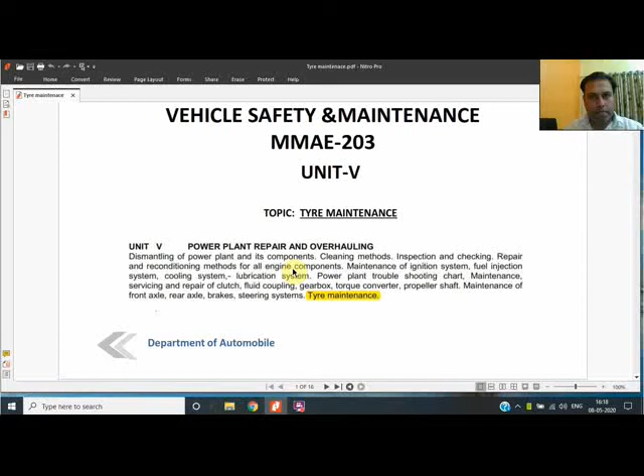Welcome, dear students. In today's lecture, we are going to cover a topic that is tire maintenance - why tire maintenance is required, and what we used to do for inspection and maintenance of tire. We will go through the steps of inspection, why there is a need of tire maintenance, as well as what basic procedure is used for maintenance of tire, that is retreading or tire rotation, and other things we are using. So starting with what tire is.

Tire is an O-ring shape made from rubber, natural or synthetic fabric, and wire, etc. Either there might be wire, or if it is a bias type tire, then threads will be there. But if a radial type is there, then wire should be there. Wire is also required in the bead, because in the O-ring, this inner ring portion is called the bead, so wire is required there.

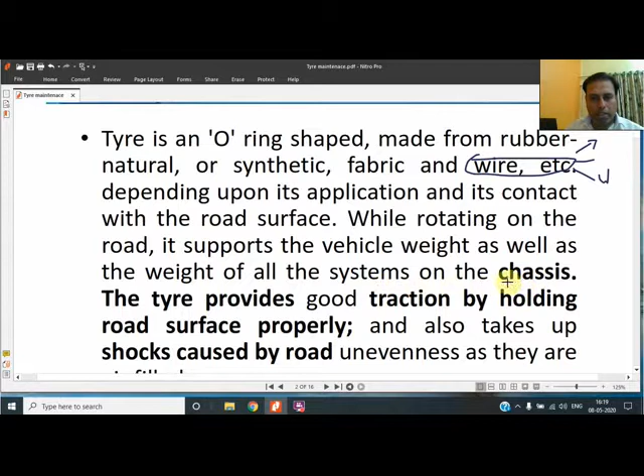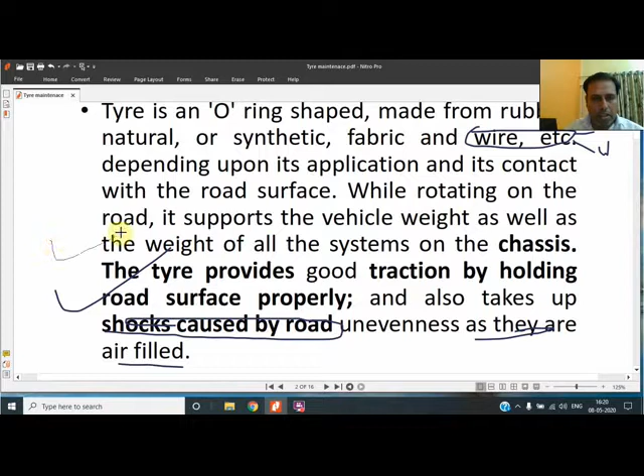Depending upon its application and its contact with the surface while rotating on the road, it supports the vehicle weight as well as the weight of all parts of the chassis, so it is a main supporting medium. The tire provides good traction by holding the road surface properly, and also takes up shocks because it acts as a shock absorber, as they are filled with air. So it is a very important part of the vehicle, for comfort as well as for the main profile of the vehicle.

Now the shape I have shown you, the O-ring shape, is the basic terminology being used. There are nomenclature methods also of the tire, but due to the constraint that we are going for inspection and maintenance only, this topic will be covered only, because we should be well aware of what maintenance and inspection methods are there, popular in the market.

So what the maintenance is - it is quite prudent to inspect and maintain tire at regular intervals for proper performance and safe running. The interval of inspection and maintenance totally depends on type of vehicle, condition of road, and driving methods. Although these three things are mentioned, as per the type of vehicle, the manufacturer gives the tire and also provides guidelines on when to go for inspection and when to go for particular maintenance. The frequency of inspection increases as it runs more.

After a certain period, based on its condition, it should be replaced or repaired. So we will go for the repair - how to repair it, and what things are used for repairing a tire. That is the retreading.

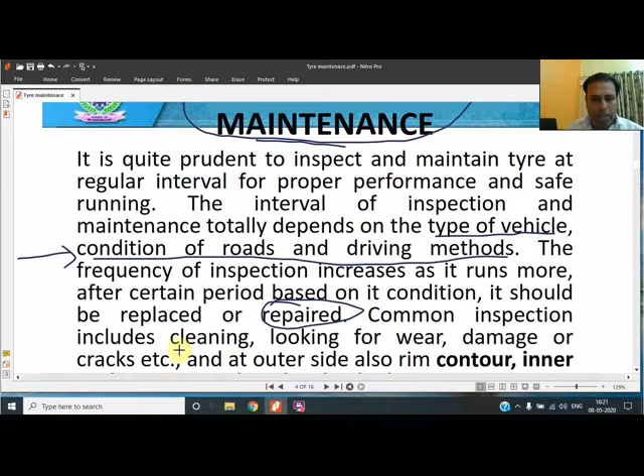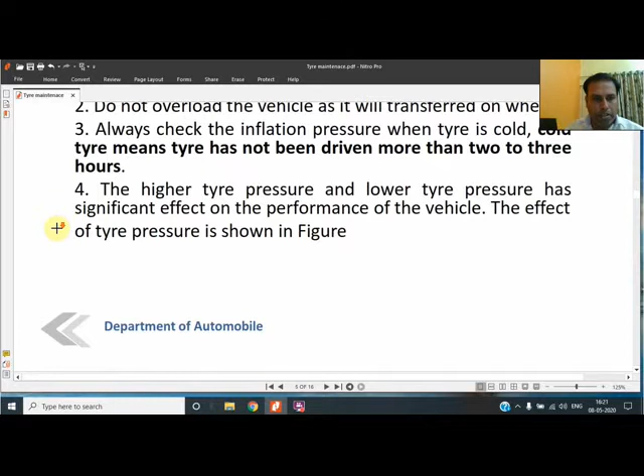Common inspection includes cleaning, looking for wear, damage or crack at the outer side, also rim contour, inner surface, etc. need to be checked. So following things need to be taken care of for proper maintenance and inspection of wheel and tire - these are the steps, meaning four things should be taken into care.

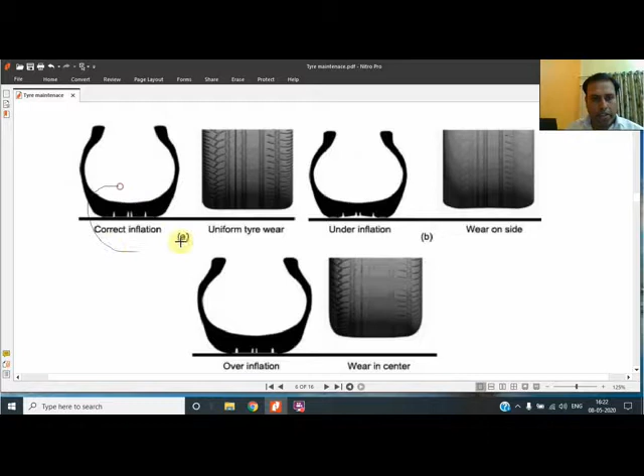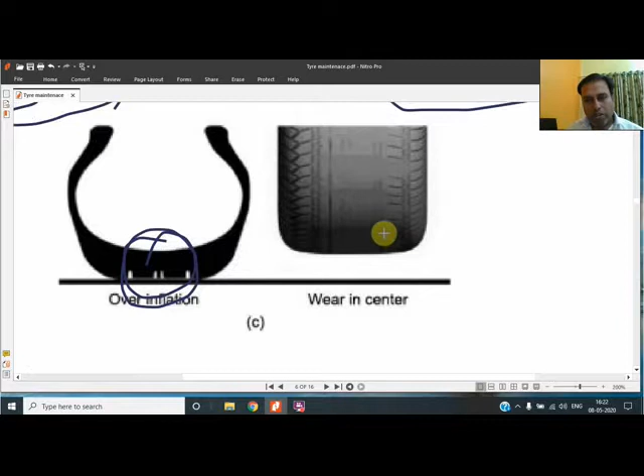Always maintain tire inflation pressure as recommended by the manufacturer, because if the tire has correct inflation, the wear will be uniform. If underinflated, wear will be on the sides - you can see the sides, the treads are removed at the side due to wear at the side surface. And if over-inflation is there, then contact will be at the center only, so the wear will be at the center. So the main thing is that correct inflation should always be there.

The second thing is, do not overload the vehicle, as it will transfer onto the wheel. And always check the inflation pressure when the tire is cold. Because when the vehicle has already run for several hours, the tire gets hot due to friction as well as braking forces. At that time, if you measure the pressure, it will automatically be high. So inflation pressure should be measured only when the tire is cold, when its temperature is cold. So standard pressure will be measured, and that will be maintained by filling air.

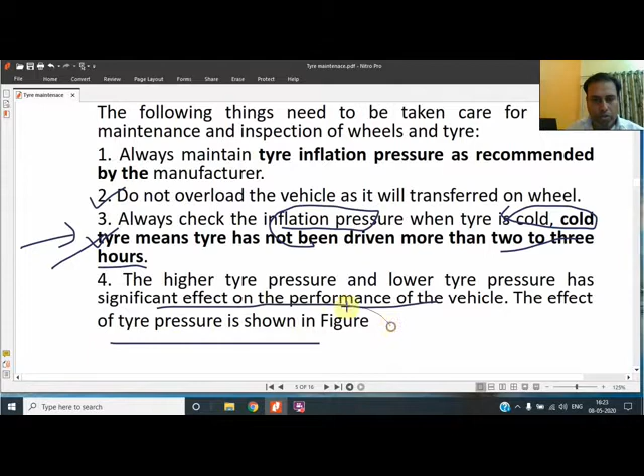The higher tire pressure and lower tire pressure have significant effects, and the effect has been shown to you in the figure also. This was the figure which was shown to you earlier also.

Now, tire wear indicator - what it is, because we have to go for the inspection, and the main inspection means when we are going for the inspection of a tire. General inspection we also used to do in our lab also. So this inspection is TWI, that is tire wear indicator. So what is tire wear indicator?

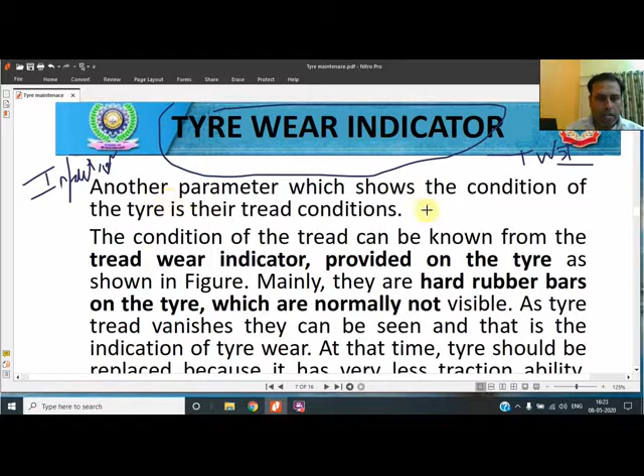This shows the condition of tire in the tread condition.

Before reading the literature, I would like to show you one video of how the tire wear indicator works. This is an illustrative video I downloaded from the net, and in this video you can directly see a tire, and on the side wall there is an indicator, either in the form of an arrow or directly written on the tire that it is a tire wear indicator.

In the same direction, if you proceed, whenever there is depth in the tread, you will see a horizontal bar of rubber. If there are 3 cuts in the tread, 1, 2, and 3, then you will see a horizontal rubber bar elevated there, and that is called the tire wear indicator, because as soon as the tread gets damaged, the tire wear indicator will automatically come out.

He will be showing it, it's a very simple thing. In this same direction, as they have mentioned, the side wall arrow was mentioned.

In the same direction, if you proceed, you will see one tire wear indicator over here, and another over here. So the tire wear indicator is shown, and for a worn out tire, the tire wear indicators have come out level with the tread. If you touch it with a finger, you will directly feel it, because they are no longer hidden - these vertical lines are out.

These are measured by means of a depth gauge or vernier calipers, because in our lab you use a vernier caliper as a depth gauge to measure the height. If the depth is less than 1.6 mm, then the tire is to be replaced as per standard. Very few go by this, because I mentioned the figure - 1.6 mm should be the value.

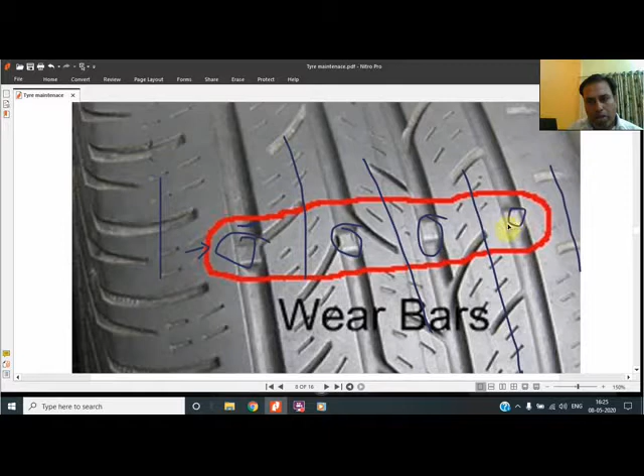One more image I downloaded from the net - you can see these are the vertical bars. Over that you have to measure the depth, and they should be well hidden inside these grooves. If the tread wears out more and more, all the treads wear out, then they will come out, and their depth from this level will be less.

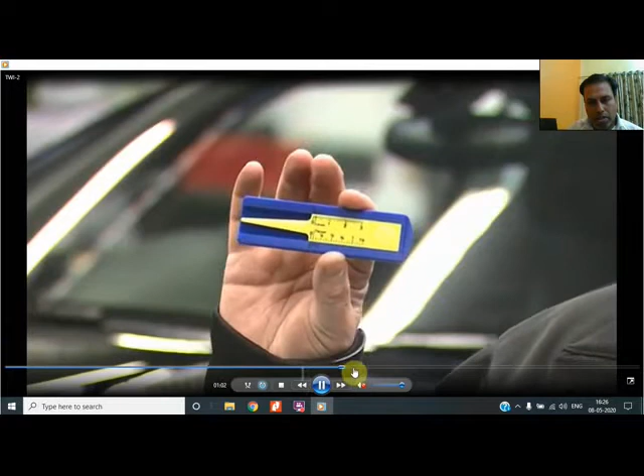How to measure the depth? I would like to show you one more video - the Michelin video I downloaded. In this, he uses a particular instrument, a depth gauge, which he places directly on the tire surface, and whatever portion is inserted inside will show the reading.

He is measuring the depth at somewhere else - he should have measured on these lines on the tire wear indicator, but he is measuring somewhere else. So when he is measuring, this much portion you are seeing is the height of the treads.

So if the value is less than the particular value I have shown, that is 1.6 mm, then the tire is to be replaced.

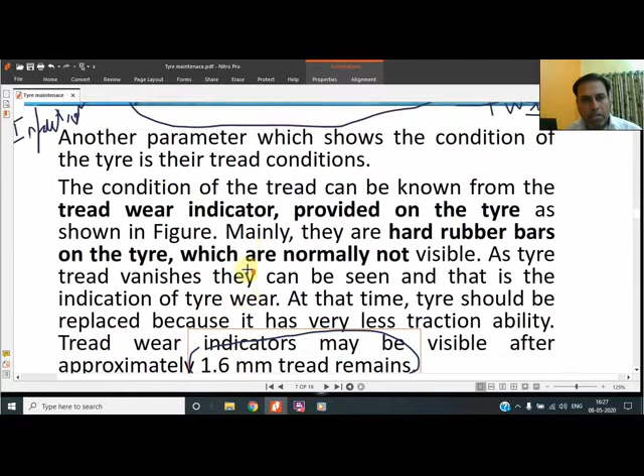Going through the literature once again regarding what tire wear indicators are, I have shown you the figure also - in the figure you can see the tire wear indicators shown, this is 1, 2, 3. These are visible or can be directly hand touched if the tire is worn out.

Once again, the video shows when they can be touched, when the tire is worn out.

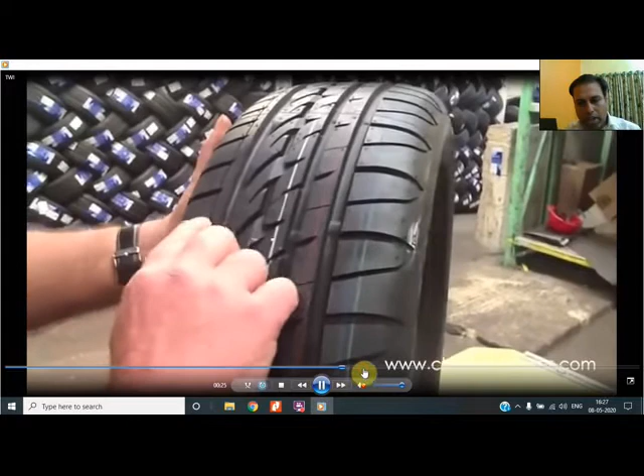For a worn out tire, the wear indicators are level to the treads, meaning they have come out. They are no longer inserted inside. Earlier they were much below the surface, but now as the tire has worn out, they have come up to the level.

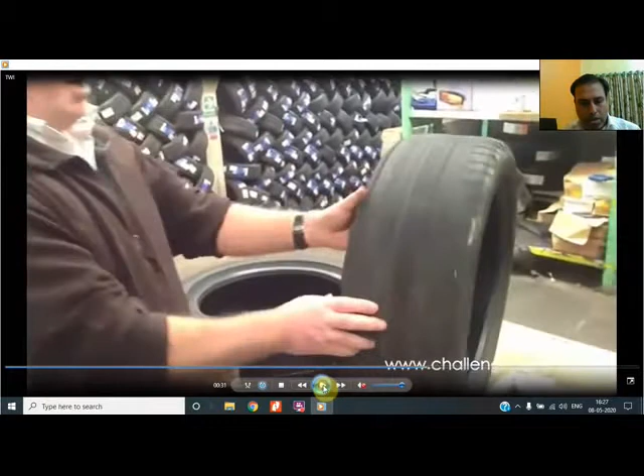This is the main thing you have to check. The condition of the tread can be known from the tire wear indicator, because anyone can know just by putting his finger on the tire as shown in the figure. Mainly they are hard rubber bars, shaped like a bar, and they are well inserted when the tire is new.

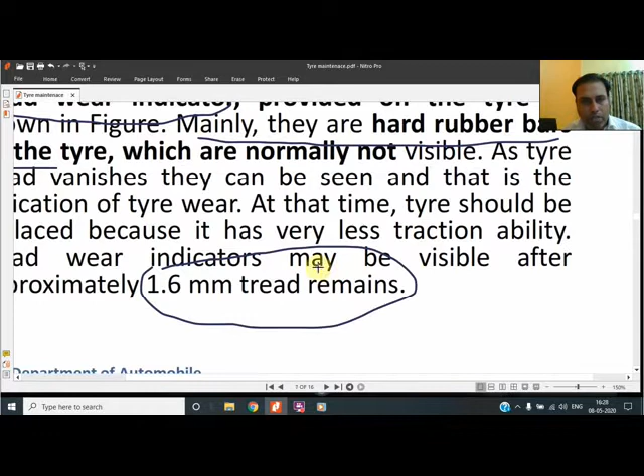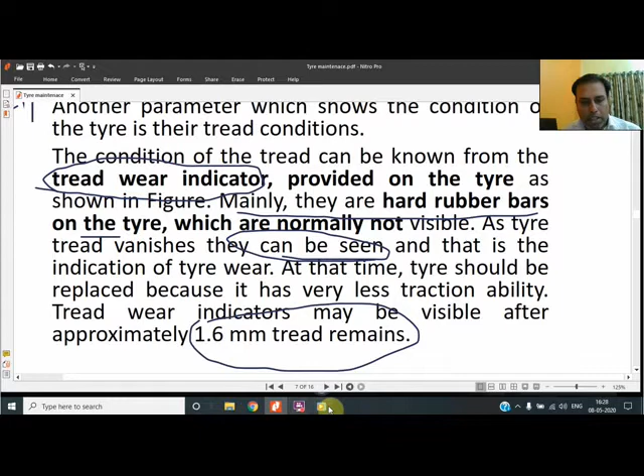On a tire, they are normally not visible, but as the tire tread vanishes, they can be seen. So that's what I was saying, that they become visible as the tire gets damaged. We are able to directly touch it because the depth is no longer there, the depth has gone out, so we can directly touch it.

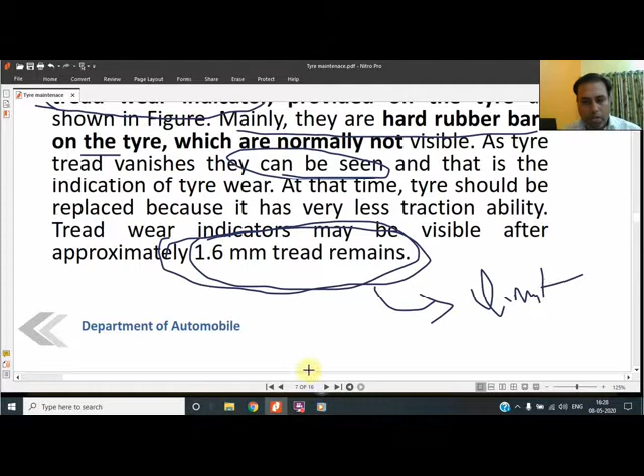The tread wear indicator may become visible after approximately 1.6 mm of tread remains. This is also the limit, because if the tread is reduced to only 1.6 mm, then we have to replace the tire. This was shown in the video.

If the tread depth is less than 1.6 mm, you have to measure the depth of the tread. You will measure it, and if it is less than 1.6 mm, then the tire needs to be replaced. This is how the tread depth is measured, and the value of 1.6 mm is mentioned as a standard value in this video as well.

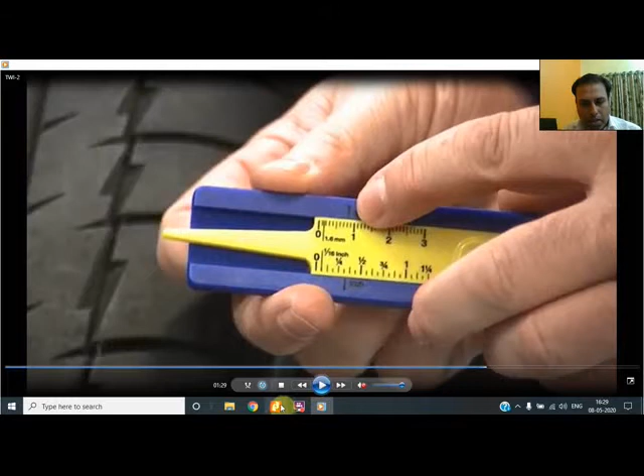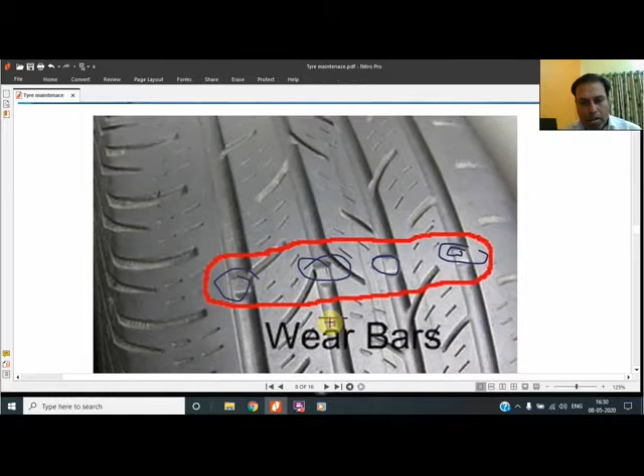If the tread goes on and reaches a depth of 1.6 mm, then the tire needs to be replaced. That's why 1.6 is mentioned separately as the standard value. You should learn it, it is given in all the literature. The value should be 1.6 mm for replacement of the tire, meaning this depth from the upper level should be 1.6 for a worn out tire to need replacement.

Tire rotation is also a method, because we have gone through the inspection method already. That was the inspection method I was telling you about. Now, what remedies can we do?

The remedy to increase the life of the tire is to rotate it, to improve the life of tire treads and reduce uneven tire wear. Since most vehicles we use are front driven vehicles, tire rotation is necessary, and the weight is also more on these front driven vehicles.

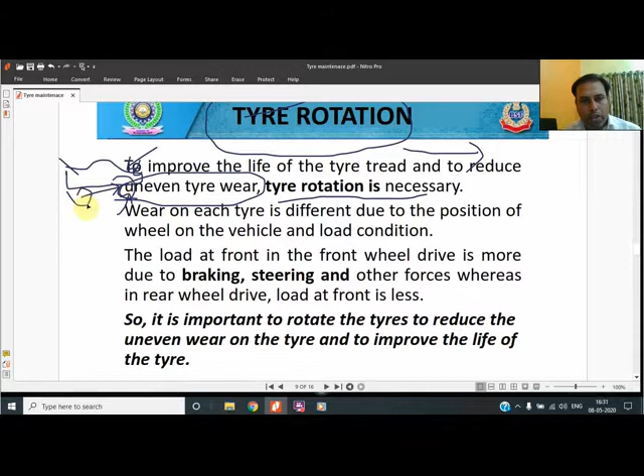In the front side, the engine weight is also there, as well as the drive train used to give power, so more wear will be there. So the tires should be given the chance to rotate, and the rear wheels which are not being damaged as much should be rotated to the front.

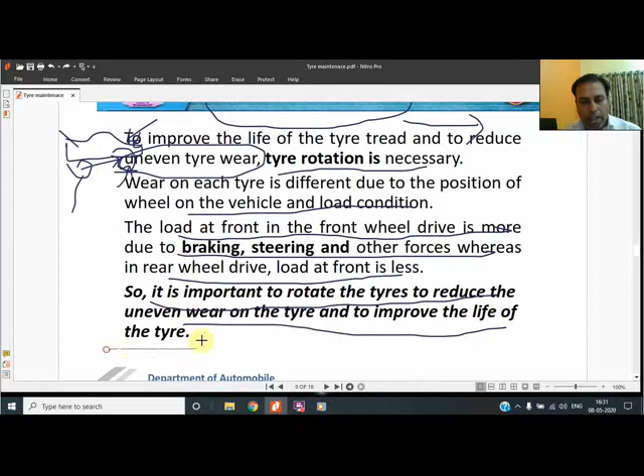Wear on each tire is different due to the position of the wheel on the vehicle and load condition. The load at the front in front wheel drive is more due to braking, steering, and other forces, so more wear will be there in the front. It is important to rotate the tire to reduce uneven wear and improve the life of the tire. This is one of the remedial methods we use.

This remedial method is shown to you, because not all vehicles are front wheel drive. The cars we commonly use are front wheel drive, but not all vehicles are. There are three methods for rotation: when the vehicle is front wheel drive, how the four wheel rotation is done; when the vehicle is rear wheel drive, such as in a commercial vehicle with a propeller shaft, how it is done differently.

The engine is at the front, but the propeller shaft gives power to the rear wheel. So what method will be used for that? And if you're including the spare wheel also, what method will be used for front wheel drive and rear wheel drive? Altogether there are 4 to 5 methods.

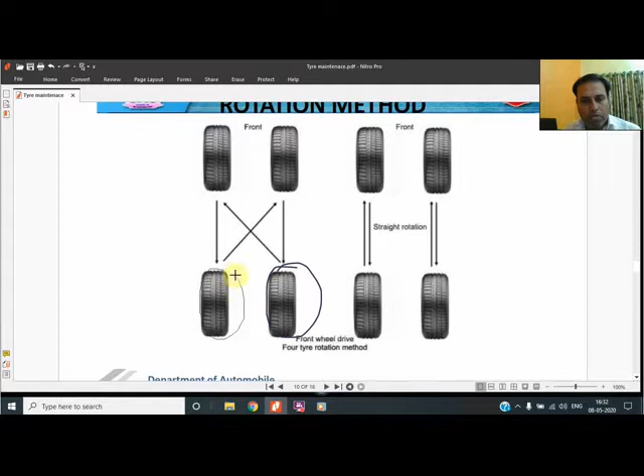Starting with the first, the front wheel drive vehicle. In front wheel drive vehicle, the arrow directly indicates that the front wheel will directly replace the back, and this front wheel also goes to the back side. These will go in the cross direction, which is adopted for the rear wheels to get uniform wear of the wheels.

Although the sign of indication is not seen on the wheel, manufacturers generally give a kilometer range, typically 8,000 kilometers, for rotation of the wheels. If no sign is seen, rotation should still be done to prevent uneven damage of the wheel.

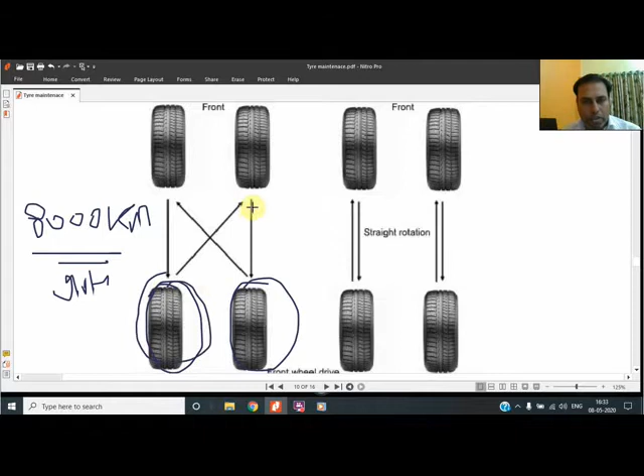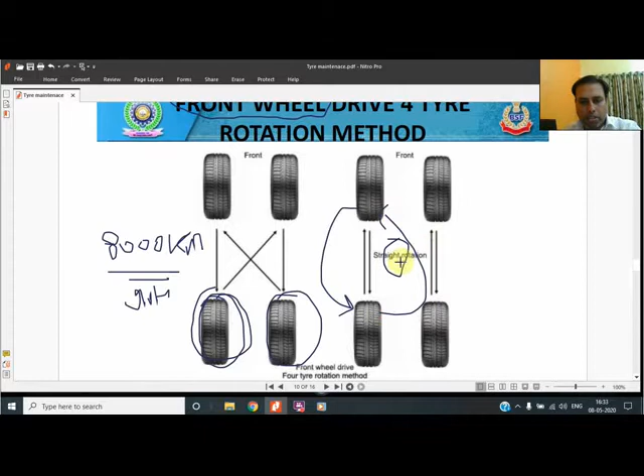Another method is simple straight rotation, directly moving to the back side and to the front side. This method is also there if the vehicle is front wheel drive. So the front wheel gets the chance to go to the rear, and the rear wheel which is safe gets the chance to go to the front.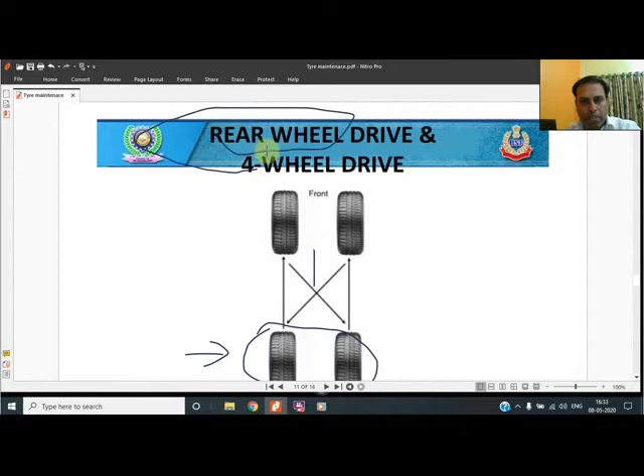If the vehicle is rear wheel drive type or four wheel drive type, the rotation is shown here. In rear wheel drive, the rear wheel will go to the front, because whichever wheel has more load will directly go to that place. Either they can go crossway, for wheels which have not had much load, or they can go directly, because direct straight rotation is also given.

The last method is if you include the spare wheel also. The rear side wheel gets replaced by the spare wheel, so that rear side wheel gets the chance to become the spare wheel. Other rotations and directions are given showing how the rotation is done.

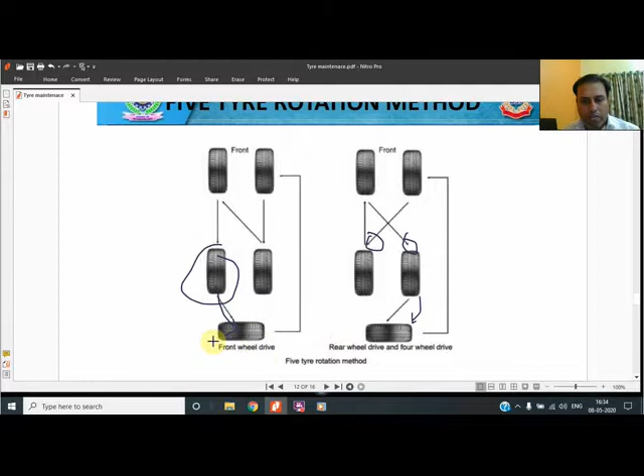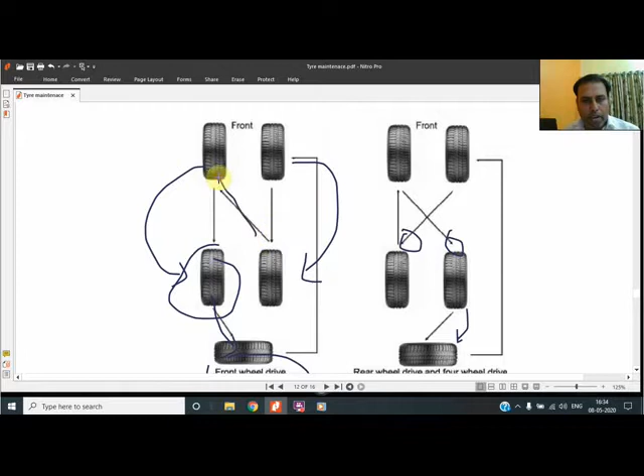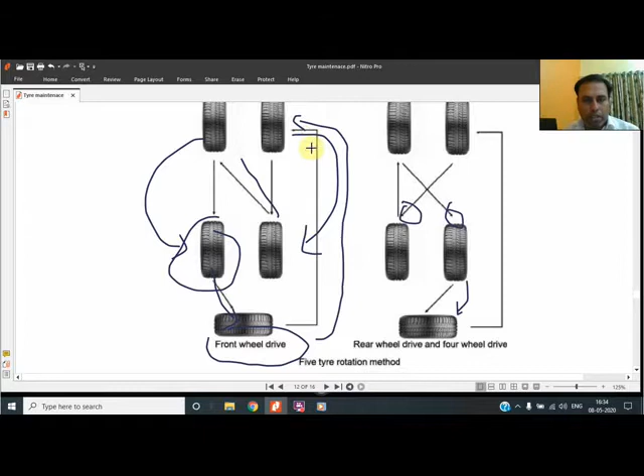So in this case there are two cases. One is for front wheel drive - directly the front wheel will move to the back side. But this time, one rear wheel will go to the front, and the spare wheel, which is completely new, will directly go to the front driver side, meaning it goes to the most adverse condition position. And the wheel which is not much used will go to this position. The arrow shows how the replacement will be done.

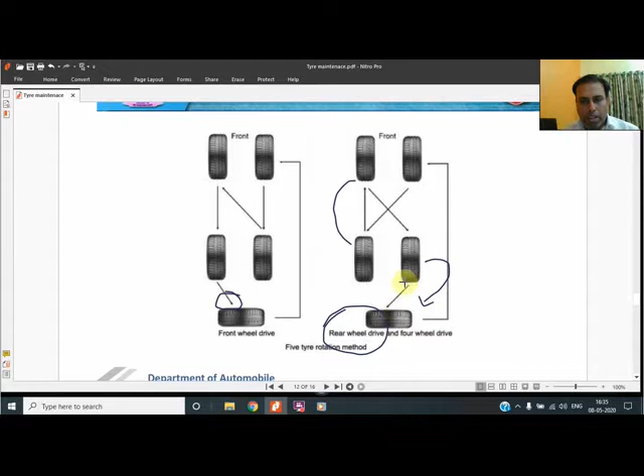If the vehicle is rear wheel drive, the rear wheel will directly go to the front, as shown here. One rear wheel which is being utilized more will go to the spare wheel position. This is how the complete rotation will take place.

Now retreading is another method for maintenance, because we have gone through inspection first. For inspection we use TWI. For prevention we use rotation. Now we are going for direct maintenance. If the tire is completely worn out and requires replacement, but the condition of the casing of the tire is good, then we go for retreading.

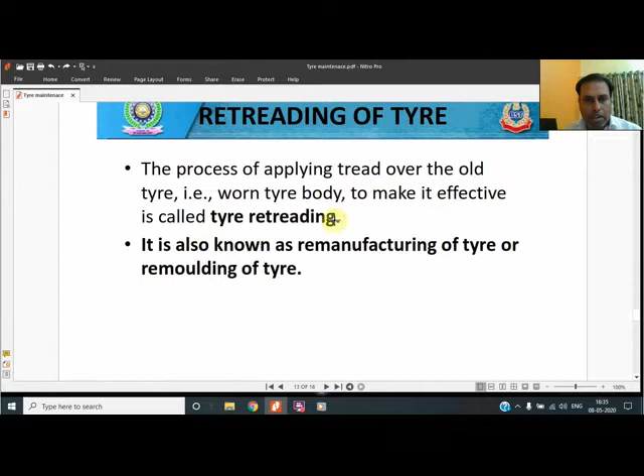The treads are removed by buffing from the tire surface, and new treads are applied. Retreading is the process of applying tread over the old tire, the worn tire body, to make it effective again. It is also known as remanufacturing of tire or remolding of tire.

There are two methods for retreading. One is the hot cure method, in which the treads are removed from the tire and a rubber coating is given on the particular tire by calendering mechanism or other mechanism directly from the roller. The treads are developed on the tire itself by the hot cure process, meaning a high temperature is given to it.

In the casing itself, the treads are developed. Whereas in cold cure, what used to happen is the treads are pasted onto the tire, and these pasted treads are vulcanized so the bond is made fixed.

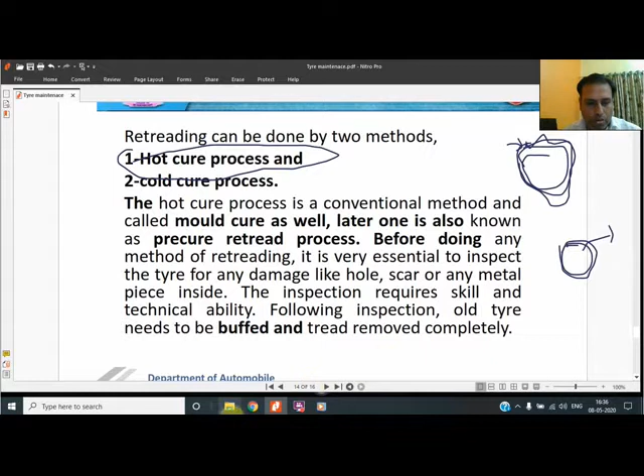I will show you some videos of how both methods, hot cure and cold cure, are done, because retreading is done by two methods. I am going to explain both to you. The main thing is buffing and skiving, the main steps used.

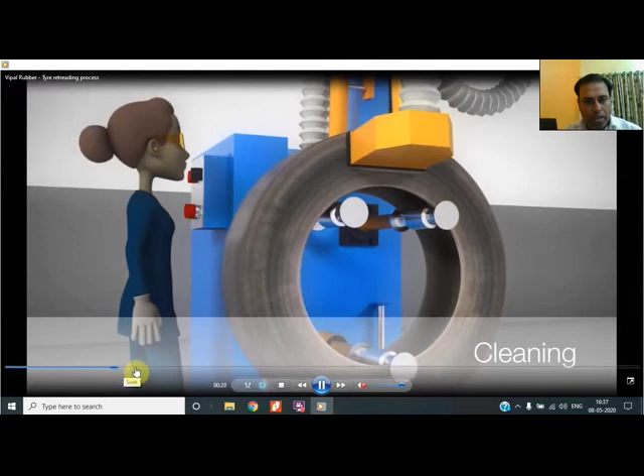Starting with the process, we should know what we are doing. So the old tire comes to a factory, and this is being shown. Visual inspection is done to the tire, cleaning is done, and it is kept in a hot chamber so that any moisture gets removed.

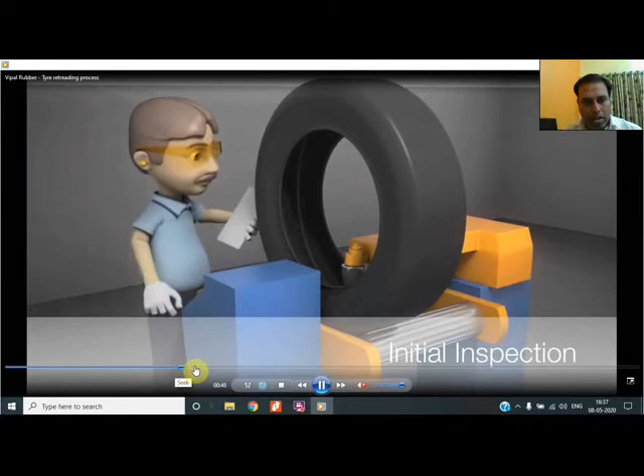Now the buffing process will start, because after inspection they go for buffing. You can see from the video that they are removing the treads using grinders, and the treads are removed from the tire. Now the skiving process will take place.

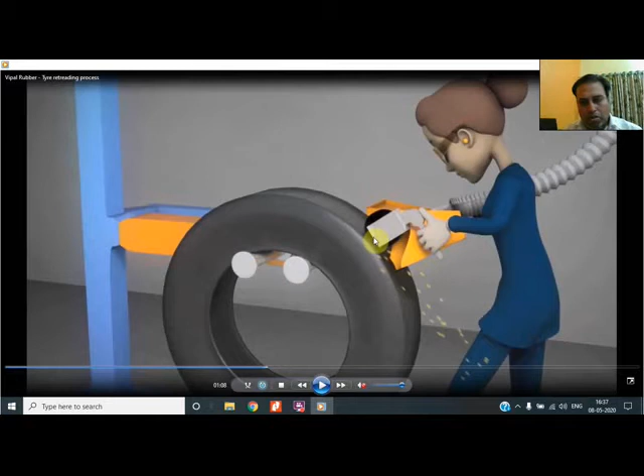In skiving, if any damage is there, it is rebuilt, whether the damage is in the bead, the outer surface, or the side walls. Some solutions, rubber patches, or other things are used to remove all the damages on the round surface.

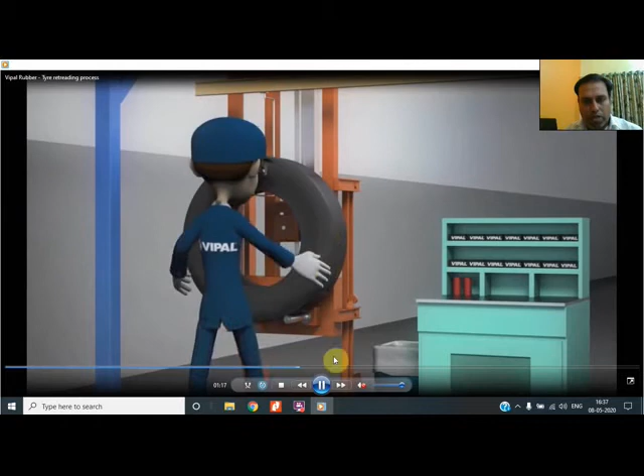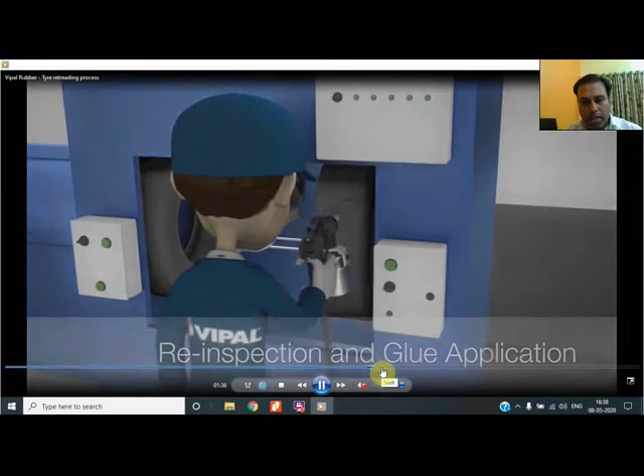Repair application and patching, everything is done after skiving, and thereafter the tread is applied. The glue is applied. There is reinspection, and after glue application, they have pasted the tread.

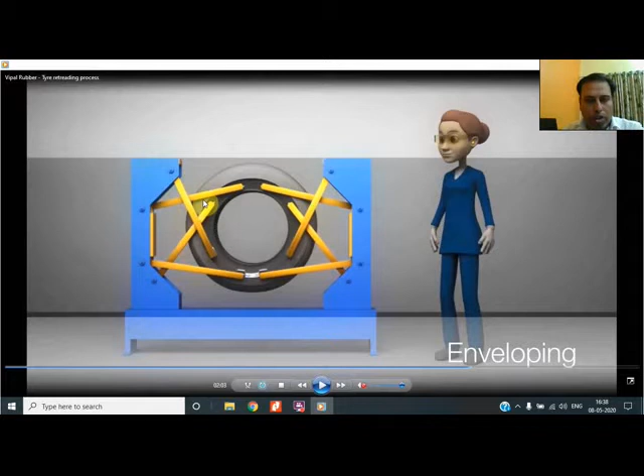This pasting of tread is called cold curing, because a tread is directly pasted. The cold method is called so because they directly paste a tread and are not sending it for curing. Curing means heating the tire in hot steam or an oven type setup.

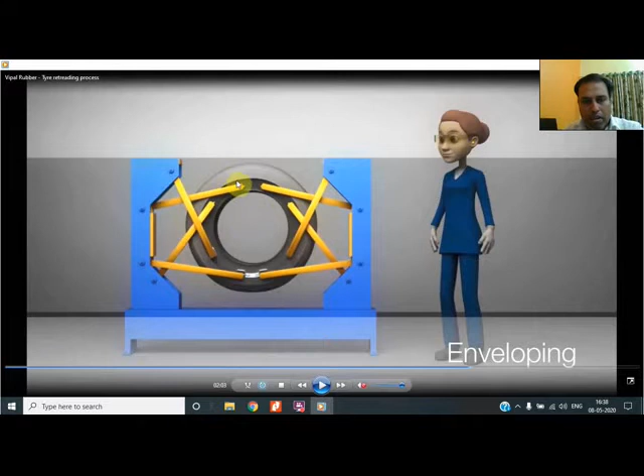The figure can also be shown: a machine, the vulcanization chamber, is there. In that, the tire is sent at a certain pressure for maintaining the pressure. An envelope has covered the tire. You can see an envelope is there on the tire, covering it.

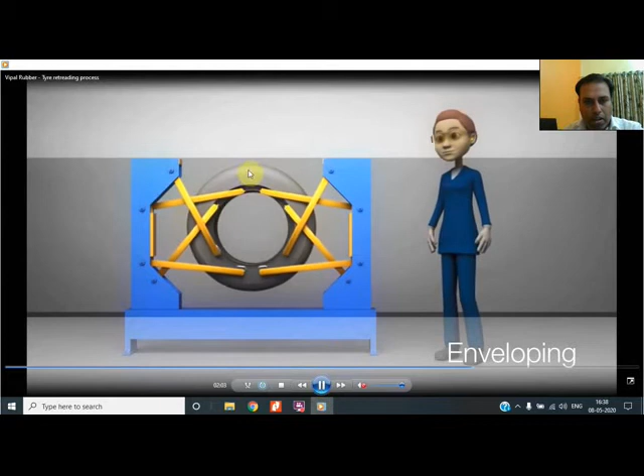So pressure is applied. In this chamber, the temperature and duration are the main things, because three things are important in the vulcanization or curing process. These three things are: firstly, the temperature, because 300 degree Fahrenheit is the temperature for curing; and secondly, the duration, because curing duration depends on the tire manufacturer, as certain companies take 2 hours or certain other hours for curing.

By how much time it has to be kept in hot steam, that is called the duration. First is the temperature, second thing is the time, and third one is the pressure.

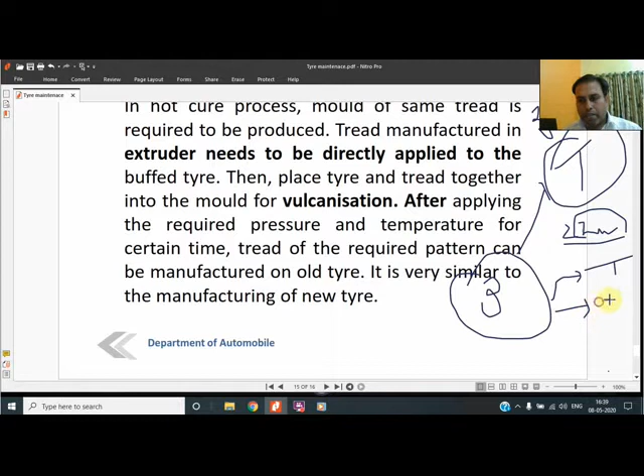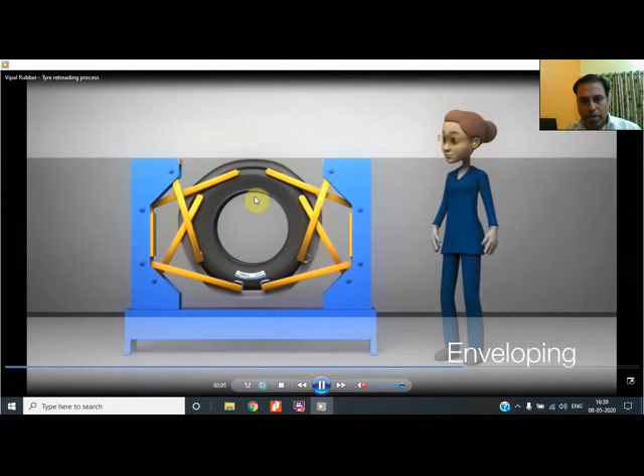For pressure, I have shown you in the video itself that they apply pressure by an envelope, which was shown to you. This envelope gives the pressure and keeps both the tread and the casing in contact. The temperature and duration have also been mentioned. So after the vulcanization process, a strong bond is maintained between the casing and the new treads, and in this way we get the new tire.

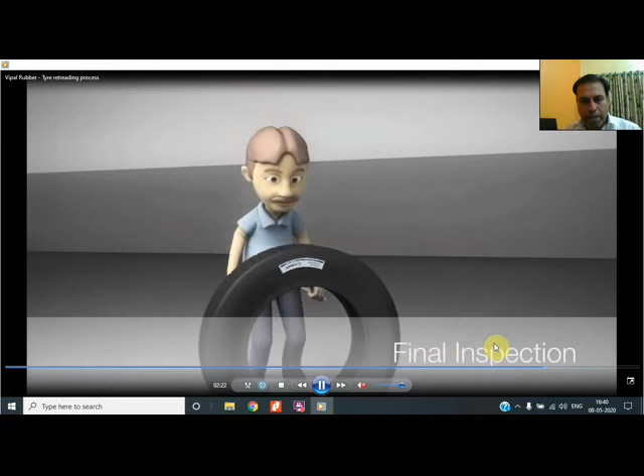Because this is an animated video, certain things are not that clear, so we will go for one more video showing how this actually takes place. For this, a Goodyear commercial tire video has been taken.

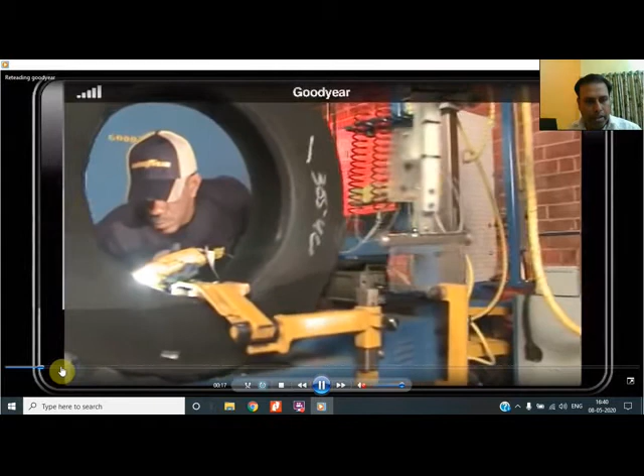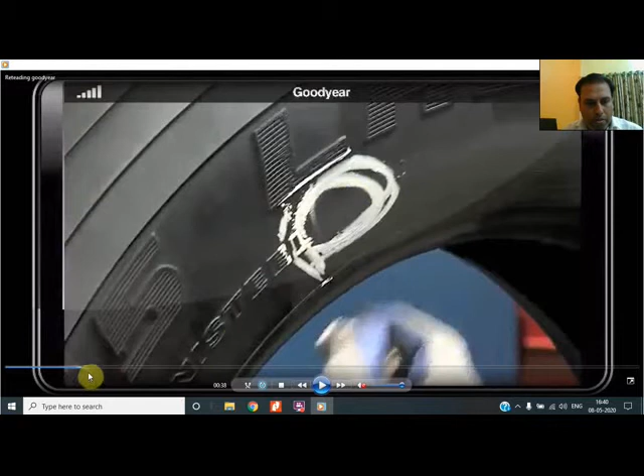In this, the initial inspection of the tire is being shown. A tire comes in and the initial inspection is done. Each and everything is inspected, and if any wear is there, it is marked, because in the skiving or repair process these are to be maintained by pasting glue or patches.

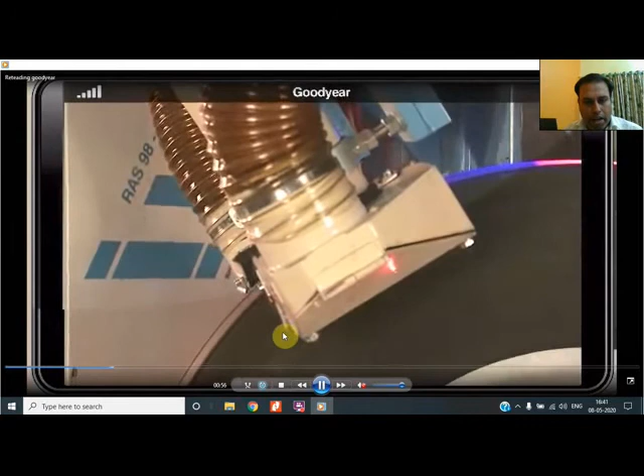These are shown, and after inspection, the tire goes for the second process, the buffing process. In buffing, the outer layer, the old treads, are grinded and removed. These are the grinders, and they start removing the layers of treads by grinding them.

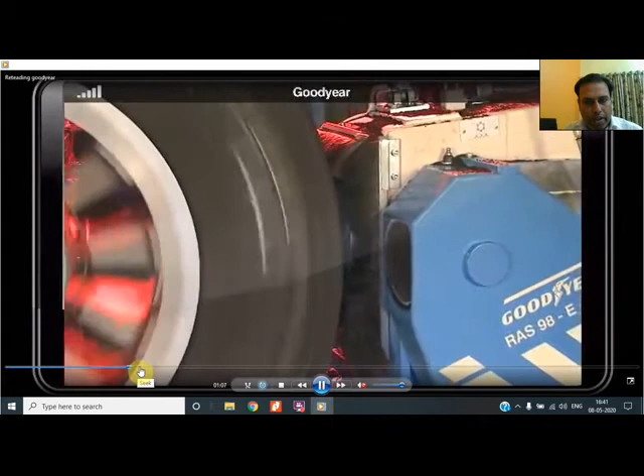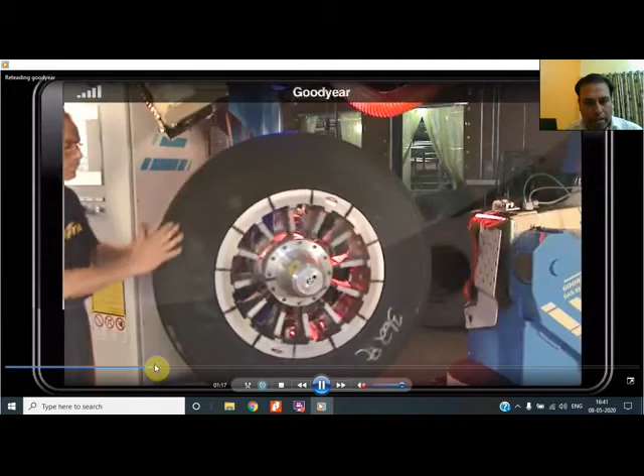So this is how they are removing the treads, and sometimes hand buffing is also required. These are removed in layers and layers by abrasive grinding, and the tire surface becomes even for placing the treads. He is also measuring whether the surface has become even or not.

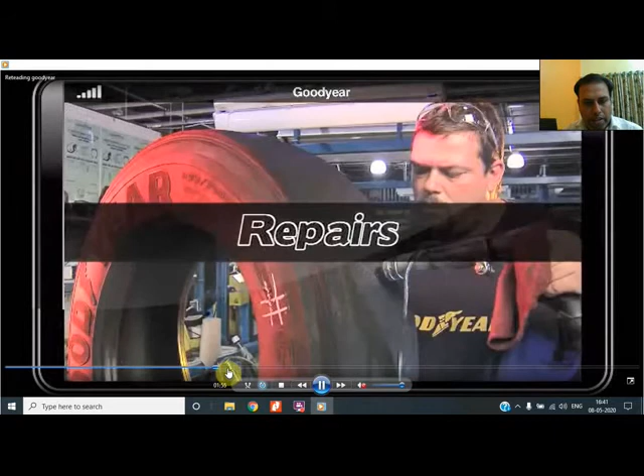Now the skiving process is there, because the chalk marks that were given, these marks were given for maintenance. So he will go for the maintenance of the tire, and wherever maintenance is required, or if any rock particle or any wire is there, then it is to be repaired. If the bead of the tire is also damaged, bead meaning this inner wire...

Then also the tire can be used. The main thing is that the wire should not be broken, because there is a bunch of wire in this bead, in the inner rings, that gets directly in contact with the wheel rim. So that wire should not be damaged. If it is damaged, then the tire is returned as received.

That is called RAR. You should know the terminology, that it is not used for retreading, it is being returned. If the tread is damaged or any major damage is there, that can't be repaired. So the skiving process is being done.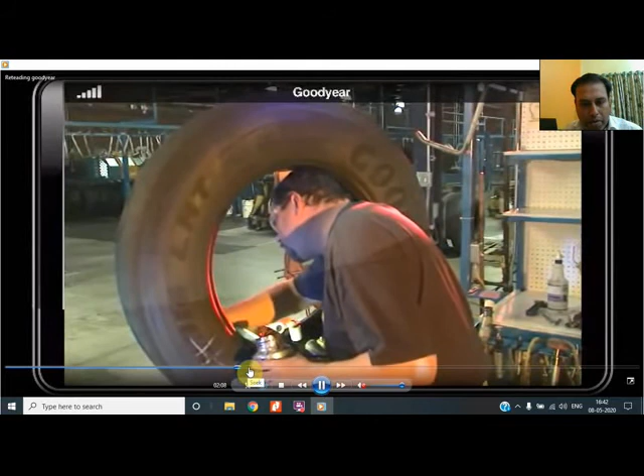So this is the rubber cement he is using. These are the Goodyear patches. These are good quality patches that give good bond when vulcanized, when heated.

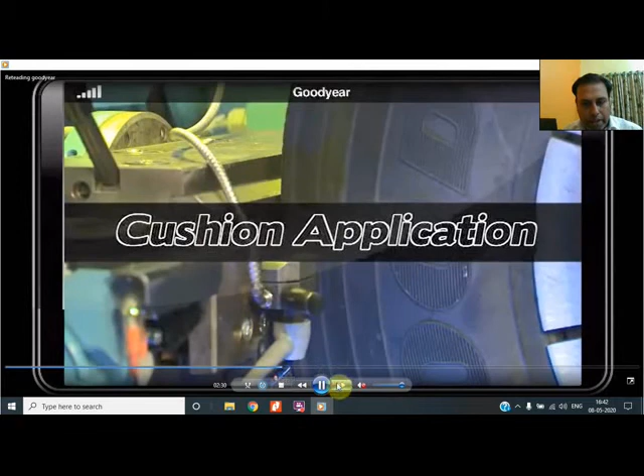And now he is applying a cushion. The cushion rubber is applied through a calendering machine or other method. So it is being shown over here, he is applying the cushion.

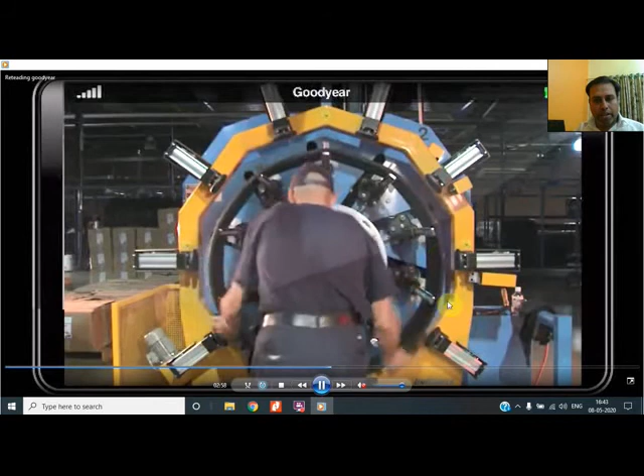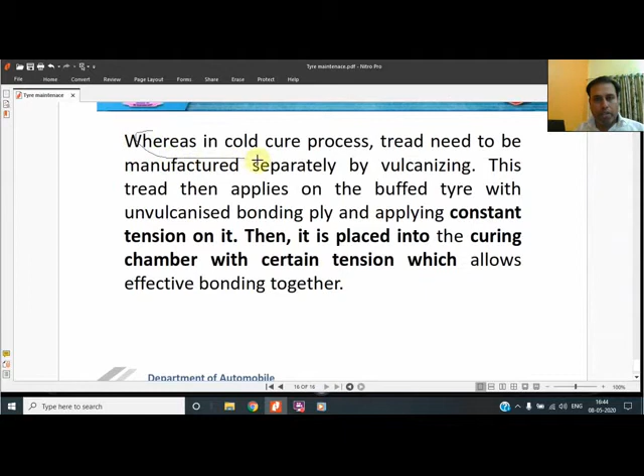Now after the cushioning, the building process is continued. In the building process, the tread is manufactured separately, as I have told. If the tread is manufactured separately, then it is called the cold cure method. In cold cure method, the tread needs to be manufactured separately. You have to learn that.

If separate treads are manufactured by vulcanizing, meaning the properties of rubber are changed from plastic to elastic by heating in a chamber, then they are manufactured separately and applied to the buffed tire by constant tension or pressure, and then curing is done. Then it is called cold curing.

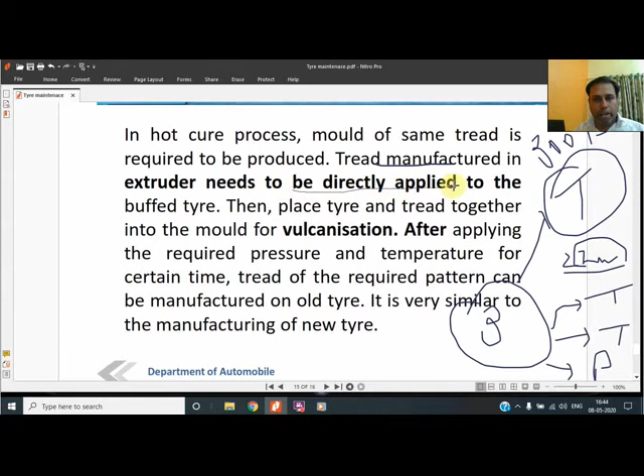If they are developed on the outer surface directly, meaning the tread is manufactured by extrusion to be directly applied, this is the hot cure method, where the treads are directly developed on the surface. I will show you through the video also.

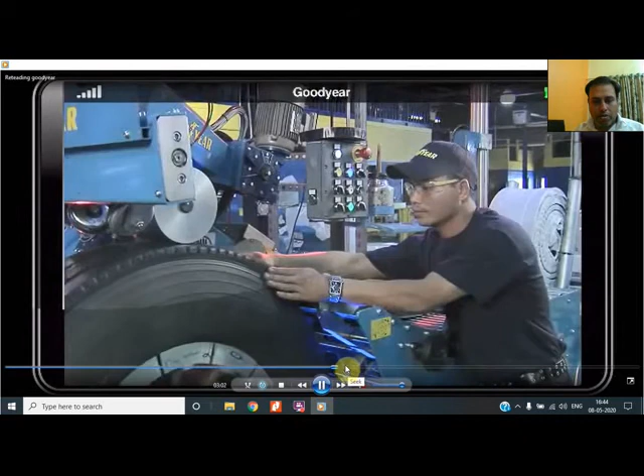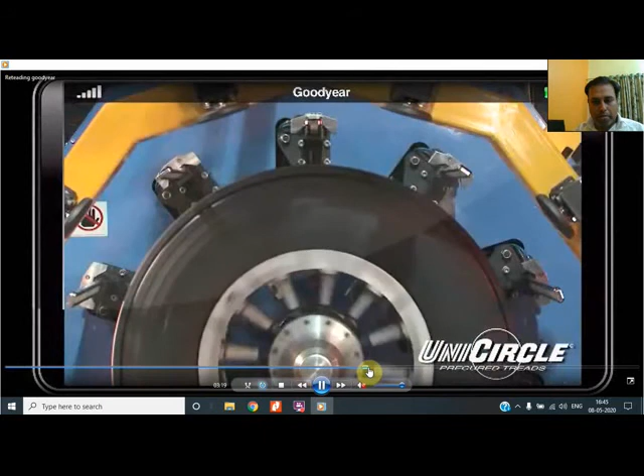This is the cold cure method he is using, because he has directly pasted the treads, and the tire will go for curing in the vulcanization chamber. But in some other method, a layer is applied and it is sent to the hot chamber. That video I am going to show you.

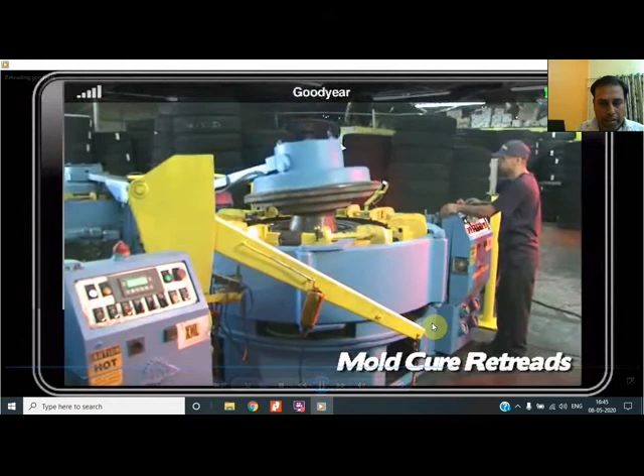Now this is the mold cure retread, the name given by the Goodyear company. This is the hot cure method. In this, the tread will be developed on the outer surface, and as soon as it comes out, it will take the shape of the casing, and the tread will be developed. Now it looks like a brand new tire, because these treads have developed on the outer surface, they are not pasted. So this is called the hot curing method.

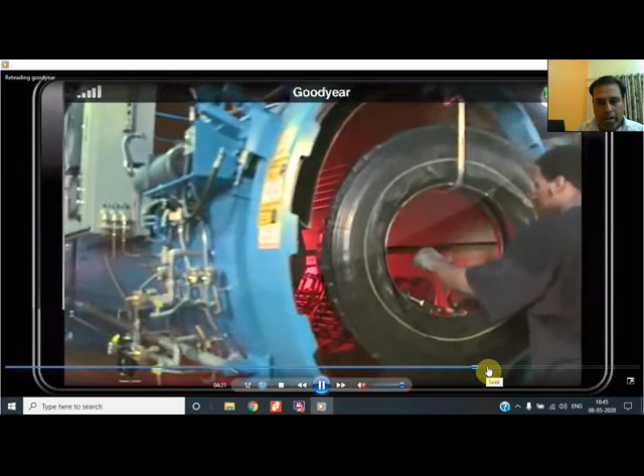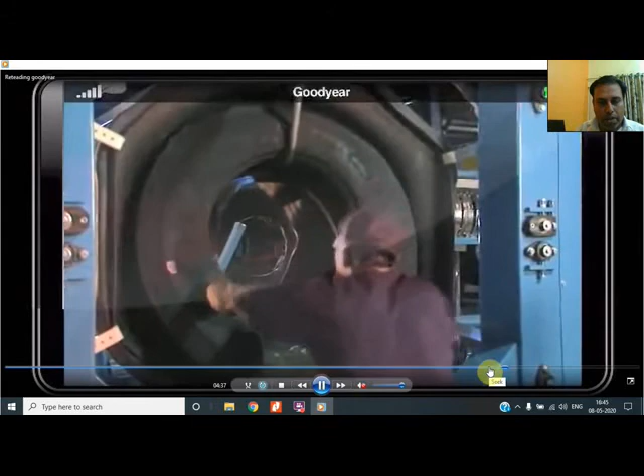And whatever curing method they have applied, later again the curing is done. This is the machine in which hot steam or hot temperature is given. In this machine, time is important, temperature is important, and the third thing is pressure. For pressure, I have shown you that an envelope is used for maintaining that pressure.

So this is how the retreading is done, and the two methods are shown: either to develop directly on the surface, or to paste the treads on the surface. So this is how the maintenance of the tire is done. This is the maintenance of the tire I have discussed.

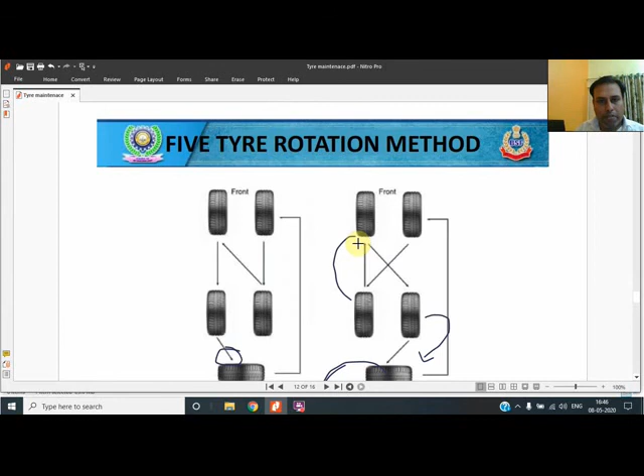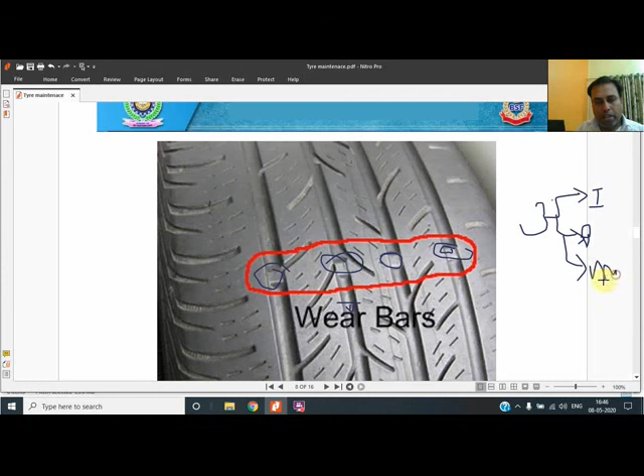The prior topic was what precautions and steps are to be done for even wear of the tire, and the first one was tire inspection. So these are the three important things: inspection, precautionary methods, and the last one is the maintenance method. If any queries are there, then please do ask.